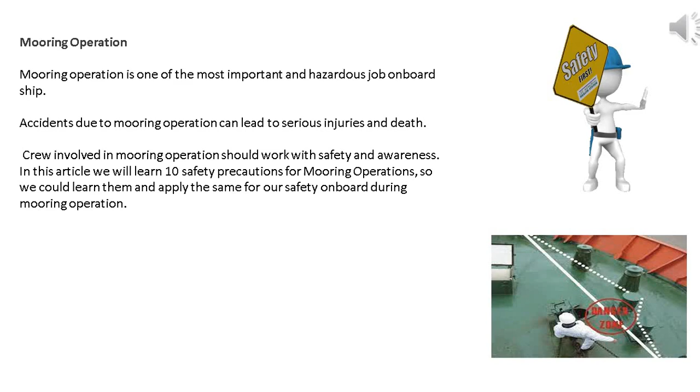Mooring operation is one of the most important and hazardous jobs on board ship. Accidents due to mooring operation can lead to serious injuries and death. Crew involved in mooring operation should work with safety and awareness. In this article, we will learn 10 safety precautions for mooring operations, so we could learn and apply them for our safety on board during mooring operation.

10 safety precautions for mooring operation. Safety is the most important priority on board ship. Mooring should be done in a safe manner to ensure safety of crew. Everyone involved in mooring should at least keep these points in mind.

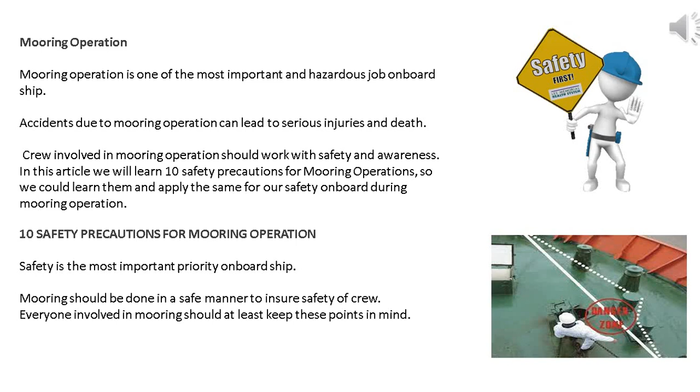A snapback zone on a mooring deck is the space where it is anticipated that the failed mooring line could recoil with great velocity, possibly resulting in injury or even death to crew present within this zone. Breaking strength may influence the trajectory of a parted mooring line.

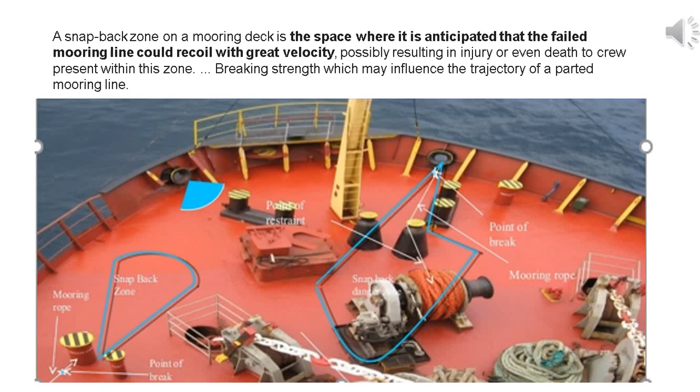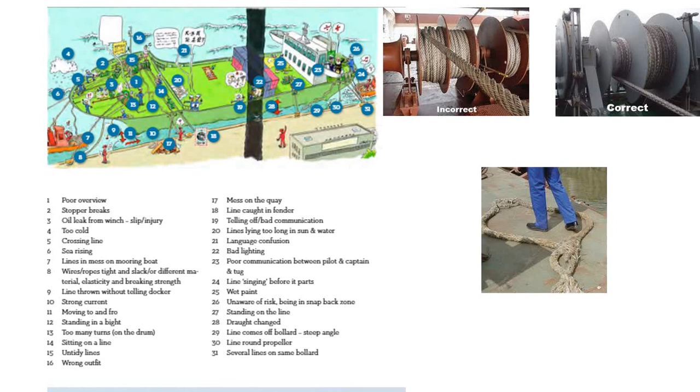Planning. Normally, ships get the mooring plan prior to port arrival so the ship can be prepared for mooring. This plan should be discussed with all the crew who are to be involved during mooring operation. By doing this, they will get an idea about what and how it is going to happen. Planning is the most important factor which leads to safety.

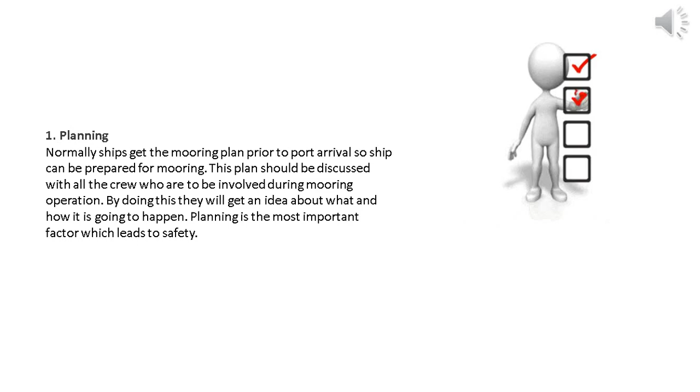2. Master and pilot information exchange. This is very important because for operations like mooring, everything should be clear between them. After discussing the plan with the pilot, the master will inform the officer in charge, forward and aft stations, about the mooring pattern.

3. Toolbox meeting. It should be done prior to mooring, in which the officer in charge should explain the pattern of mooring and discuss safety precautions to be taken. He should also make sure everyone has worn proper PPE.

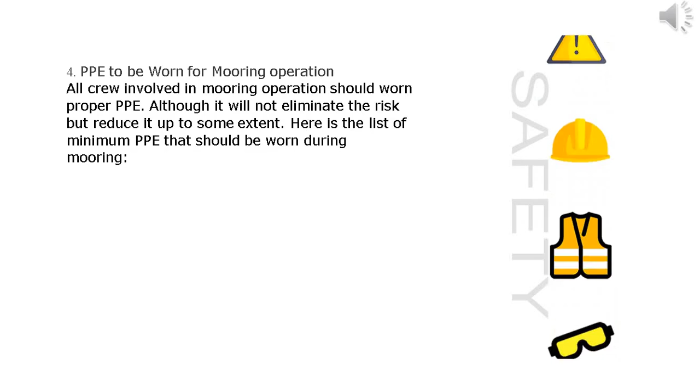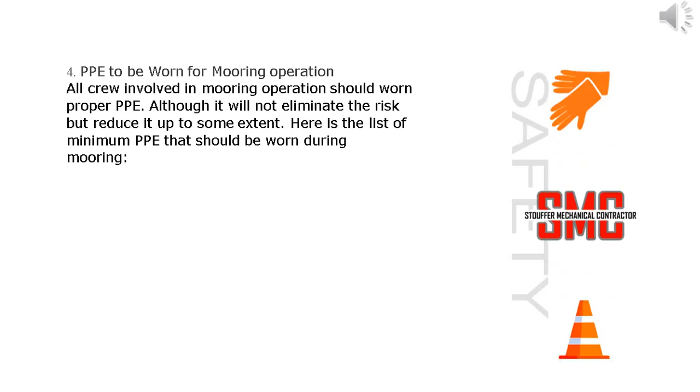4. PPE to be worn for mooring operation. All crew involved in mooring operation should wear proper PPE. Although it will not eliminate the risk, it will reduce it to some extent. Here is the list of minimum PPE that should be worn during mooring: coverall, safety shoes, safety helmet, safety gloves.

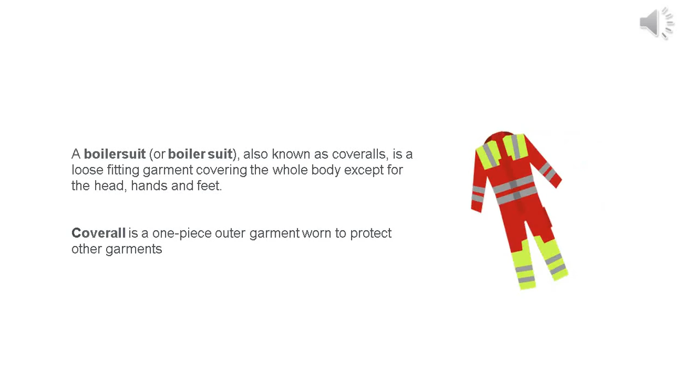A boiler suit, also known as coveralls, is a loose-fitting garment covering the whole body except for the head, hands, and feet. Coverall is a one-piece outer garment worn to protect other garments. Safety shoes, also known as safety boots, are worn to protect against physical hazards and provide comfort to the wearer while at work. Safety helmets are personal protective equipment designed to protect the upper part of workers' heads from falling or flying objects, impact, burns, and electrical hazards.

Safety gloves allow the workers to work safely without contaminating the workspace or hurting themselves. Safety glasses are a part of personal protective equipment that are worn by the workers around their eyes for protection. Safety glasses act as a shield to protect the eyes from any type of foreign debris that may cause irritation or injury.

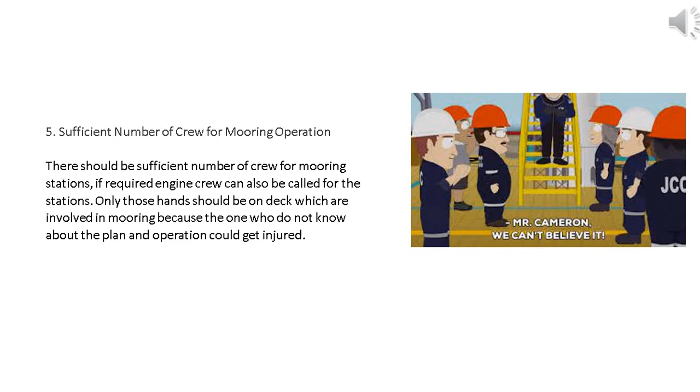5. Sufficient number of crew for mooring operation. There should be a sufficient number of crew for mooring stations. If required, engine crew can also be called for the stations. Only those hands should be on deck which are involved in mooring, because the ones who do not know about the plan and operation could get injured.

6. Communication. This is very important. There should be no confusion at all among the crew involved in mooring. Many incidents have occurred due to lack of communication. It should be a closed loop and effective communication. Channels and walkie-talkies should be decided before station, and if there is too much disturbance in the channel, it should be changed to another channel with less disturbance.

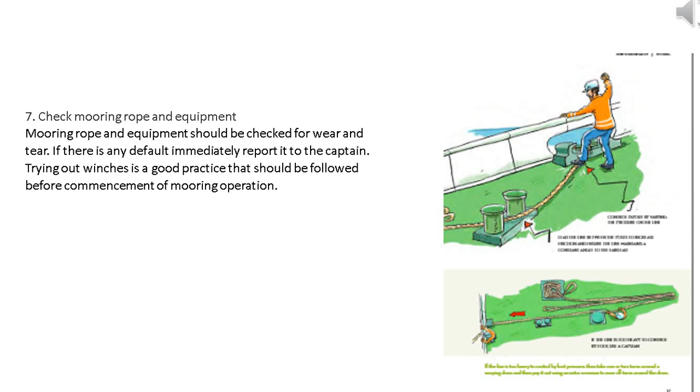7. Check mooring rope and equipment. Mooring rope and equipment should be checked for wear and tear. If there is any default, immediately report it to the captain. Trying out winches is a good practice that should be followed before commencement of mooring operation.

8. Tend one line at a time. Avoid tending 2 lines at a time. I know it is fast, but it could lead to incidents, because the rope may part due to unequal distribution of load. Always tend 1 line at a time.

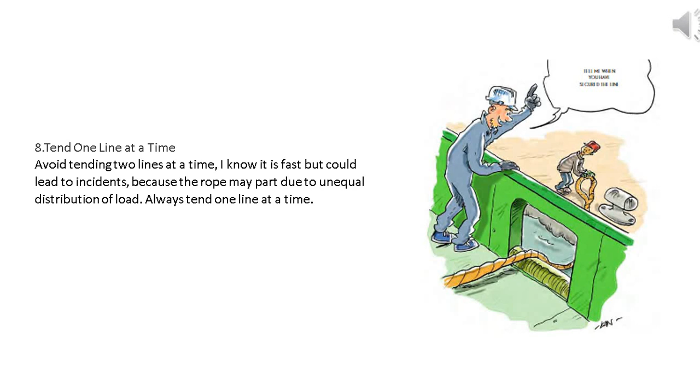9. Avoid steep angles. Steep angles should be avoided because they can cause wear and tear in the rope, which may lead to parting of the rope. The officer in charge should inform the master if he thinks the angle is too steep and the rope is touching ship structure, for example, ship railing.

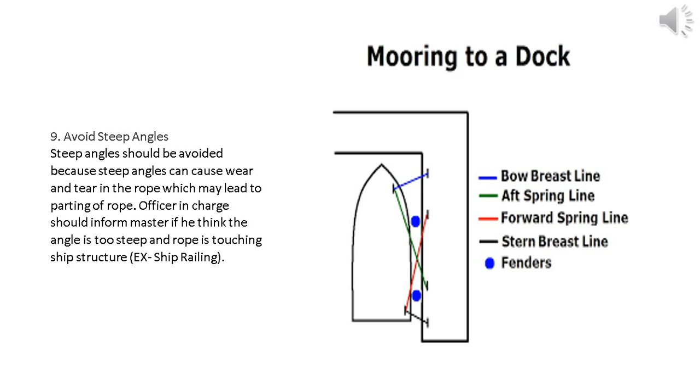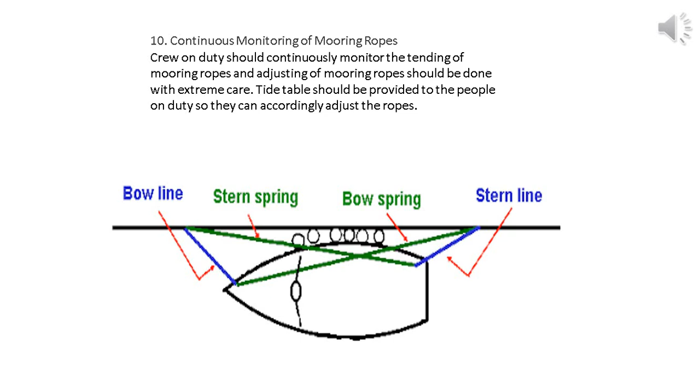10. Continuous monitoring of mooring ropes. Crew on duty should continuously monitor the tending of mooring ropes, and adjusting of mooring ropes should be done with extreme care. Tide table should be provided to the people on duty so they can accordingly adjust the ropes. Duty officer on ship's office should monitor the load on ropes.

These are some points which every mariner should consider for safe mooring operation. We should be aware during mooring. Incidents happen when we hurry up things to complete them fast. I know the pressure of that situation, but life is way more important.